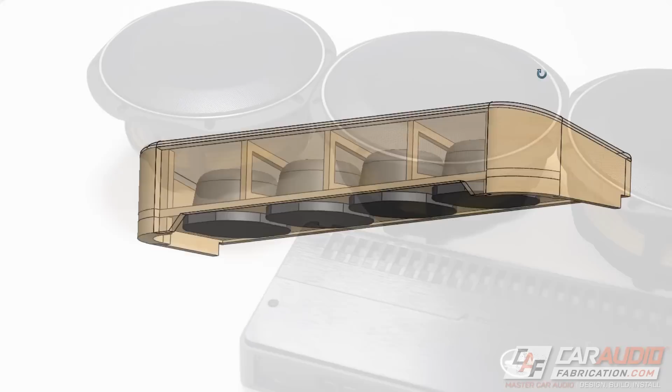I'm currently working on making an underseat subwoofer enclosure for a truck that will hold 4 10-inch subwoofers. In the last video, we went step by step and we came up with this design. Now we could very easily just wrap this enclosure with carpet and install it into the vehicle and have a very cool build. But you guys know that here on this channel, I like to spice things up a little bit more, and we're going to be doing some cosmetic features along with some beauty panels.

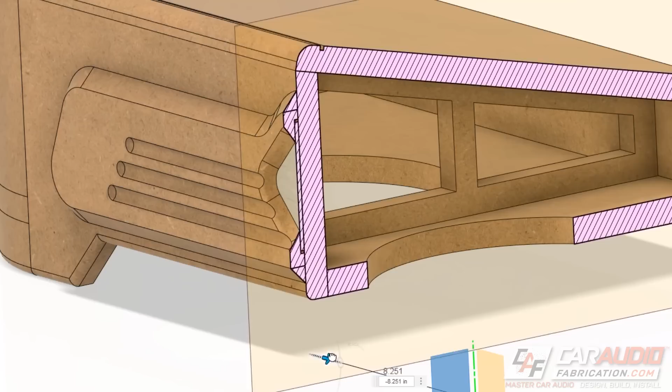All of this is in an effort to make the subwoofer enclosure look like it belongs as part of the vehicle. So in this video, we're going to get into those details and we're going to come up with a plan.

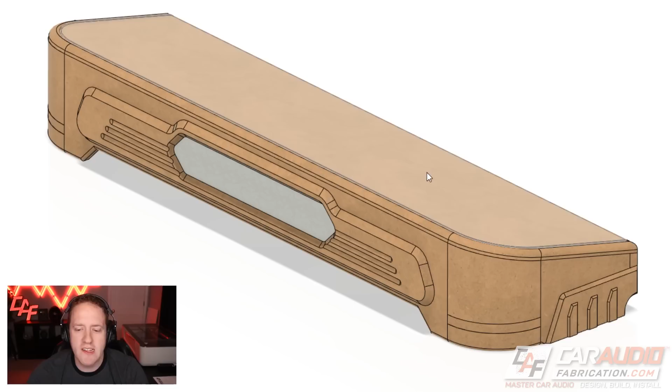Alright guys, so here we have our finished design, and if you watched the last video, you know that I like to start with showing you guys the finished design. That way you kind of have an idea what we're working towards as we go through each of these steps. So I'm going to be kind of brief here, but check out, we have a design on the side here. Kind of remember what this looks like in your mind, and then we also have a design on the front here. Again, kind of look at those angles and the fact that there's a lot of chamfered edges. Keep that in mind because we're going to get into the vehicle DNA.

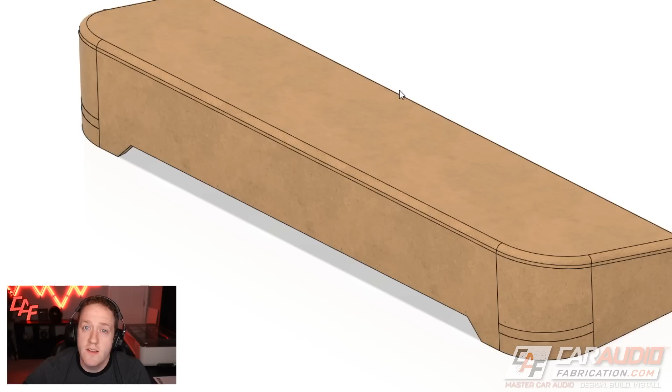It's got bracing on the inside, and it's got an angle cut on top because it's going to be sitting underneath the seat. It also has rounded corners on both front edges to match up with the front corners of the seat, so it's not sticking out at a hard corner there, it actually matches.

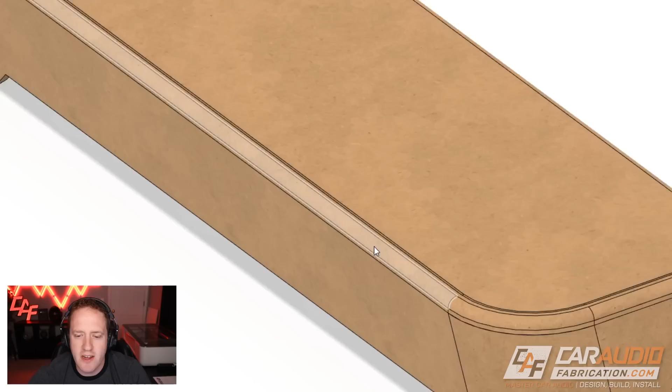The first thing I decided to consider was how I was going to transition the different materials. I knew that on top of the enclosure I just want to carpet it, since carpet will do a better job of being durable as the seat folds back against the enclosure several times. If that was vinyl all the way across, you could end up with lines as the seat rubs against the top.

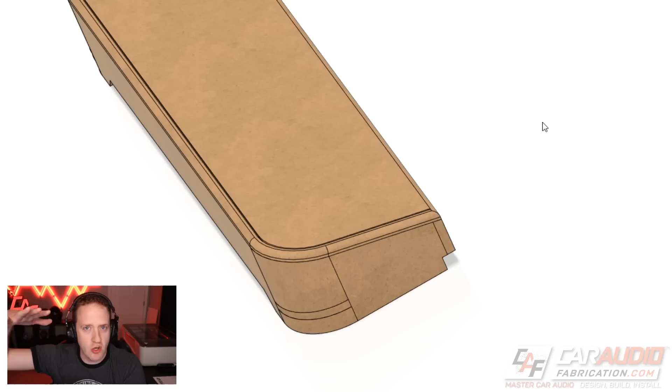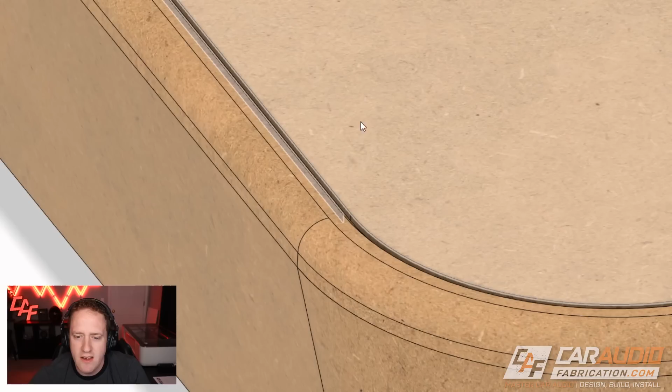We want to keep everything durable, so I used carpet for the top surface, but I want a refined look, so I used vinyl for the front and sides. For that reason, I need a transition gap where I can wrap the vinyl from the front and sides and tuck it in before transitioning to the carpet. So I modeled in a nice 1/8 inch gap that I'm going to make using a router when I actually build this enclosure.

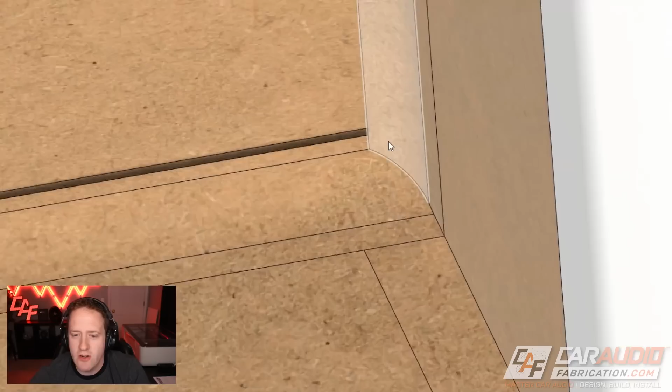Now if we look at the back side of the enclosure, so far where I modeled this, it kind of ends right here. I need it to transition around the back side because I want my vinyl to wrap around this corner and have the back side be carpet as well. So I also created a sketch and extrusion to make that cutting path too.

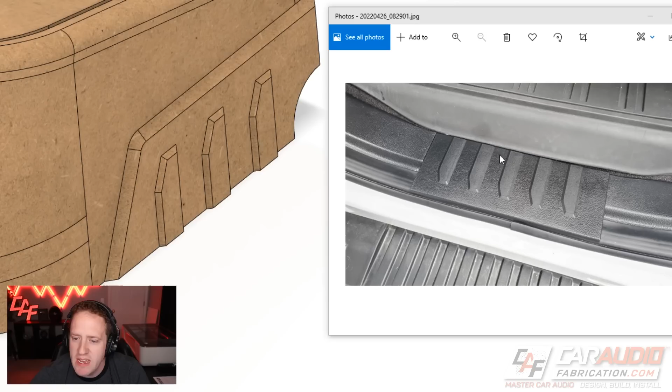We always want to be thinking about our finishing materials as much as we can as we go through this process. On the sides of the enclosure, I wanted to add these features, the design intent being to match the side of the door sill. I wanted to make sure these details were very similar in appearance, not only in how they looked but how they were scaled, so I took a couple quick dimensions of the actual vehicle's notches on the door sill and used those same dimensions to get the same angle on our design.

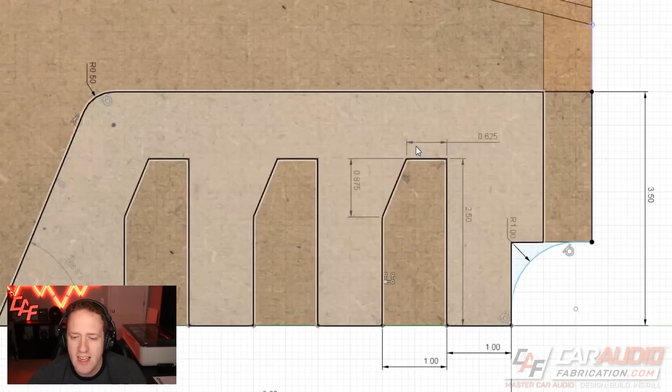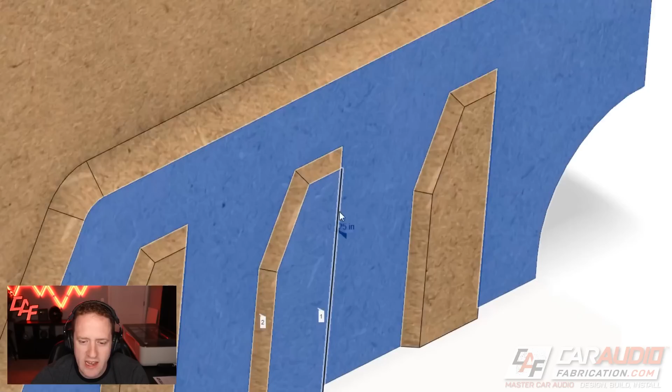Now I want to make sure these details really have some dimension to them, so this is going to be made from two different pieces. This surface and behind it is going to be one piece, 1/4 inch thick, as you can see from the measurement. Then these details on the front that I'll cut out are only 1/8 inch thick. So overall it's going to be 3/8 inch thick on those parts we're going to wrap with vinyl, which doesn't sound like a lot, but once we put the vinyl over them, it's going to have quite a bit of dimension.

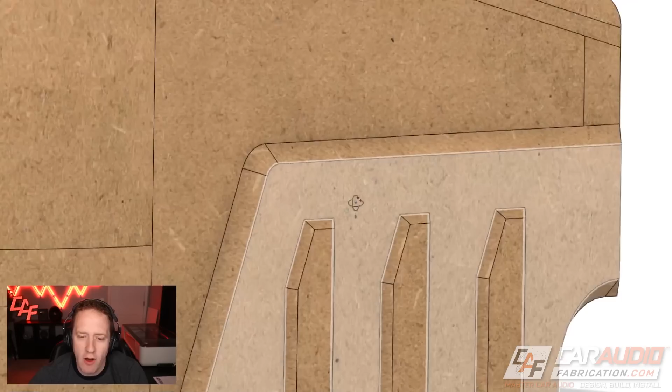Remember that angle we talked about earlier that we wanted to incorporate? That's why I've added that there. I've also modeled in some chamfers because there's a ton of chamfers throughout the interior of this vehicle, which I can easily do with a chamfer bit on the router once I make these pieces. Now look how this angle here is very similar to the angle on the outside of this overall insert.

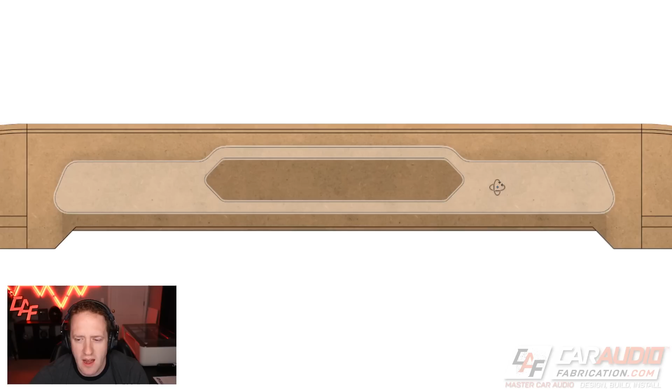To come up with this insert, I started out creating this sketch on the front of the enclosure. I then extruded that into this piece that I'll be making. And since this is an insert, I want it to actually insert into this outer ring here, so I had to model up that ring by just doing an offset of this geometry.

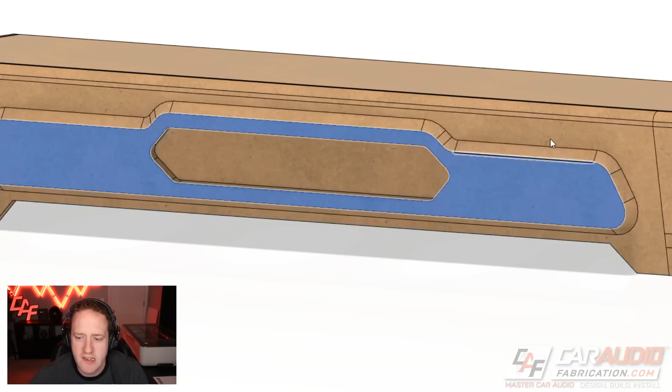What's cool here is I don't necessarily have to make this ring out of wood. I could use fiberglass materials like body filler around the outside of this shape, or I could cut it out of wood to probably save some time, which is what I'll likely end up doing. Once I cut that piece out of wood and add a large chamfer, we basically have a simulated body filler insert made out of wood, which should save us some time.

I will probably end up adding some body filler around the outside anyway, just to really smooth everything out completely so that you don't notice this hard edge wrapped in the vinyl. It will give it more of a perfect look.

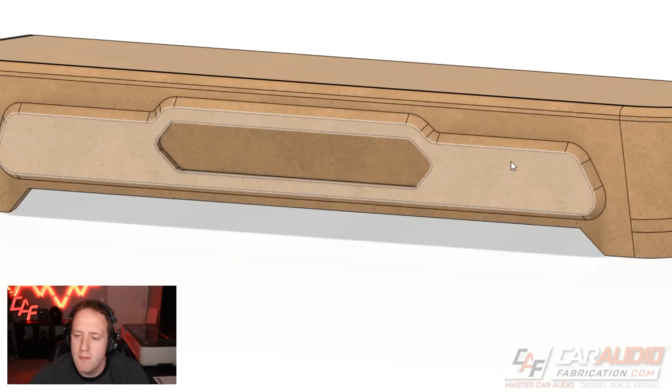But regardless, now we have that insert surrounded by an outer chamfer. Again, because those chamfers are so common, we want to add a chamfer on the inside of this viewing window here. The plan is on the inside here, I want to have some acrylic that's going to have the logo and the different companies that are sponsors of this build.

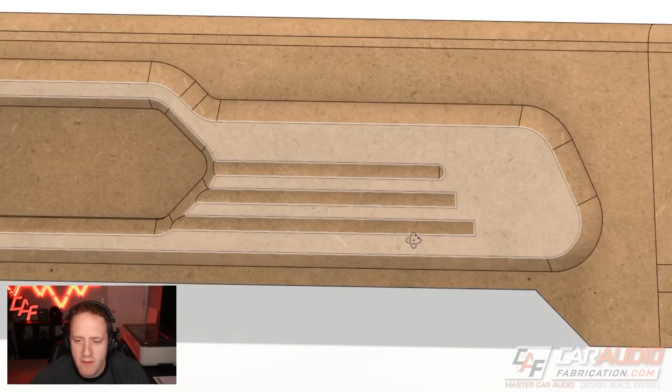In the meantime, you can see I've also modeled these 3 lines here. What those end up being, if we step further through our design history, is some additional details that I'm going to make with a bullnose bit using the router on the front of this piece. I of course want those details to carry over to both sides of the enclosure, so I'm going to mirror that feature as well.

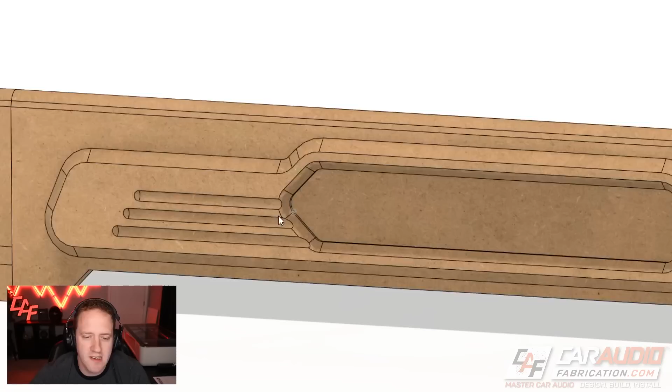One of the reasons I really like planning out all the different router pass cuts I'm going to be making is you can just get a feel for the final geometry. This would be hard to really visualize in your head, how these different arcs end up combining with this chamfer right here. But when we actually model it and model those cuts, we can see how that's going to look when we build it, and I actually kind of like the way that this looks.

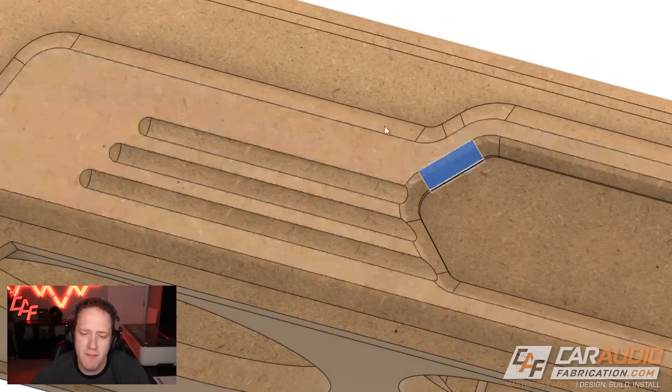I think it looks kind of non-organic, but interesting and cool. And I think it continues to carry that design DNA of having the chamfers, but in this case, we're combining it with something a little bit different that adds some additional extra flair.

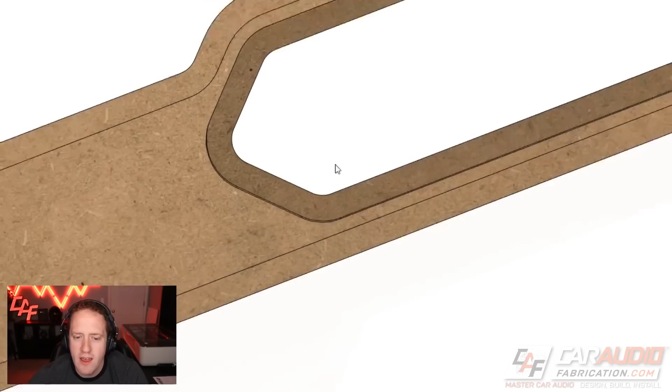Now I want to make sure that I have a plan for how this acrylic piece is going to fit inside of our insert there. So what I've done, if we go ahead and hide the subwoofer box and turn this around, you can see that I've modeled that piece of acrylic in there. And if I hide it, what I've done is I've cut myself a nice little pocket on the inside that acrylic can sit into. Again, it's good to get a feel for all these different dimensions and the different size router bits that you're going to need to use to cut all of these different locations for our different pieces to fit together.

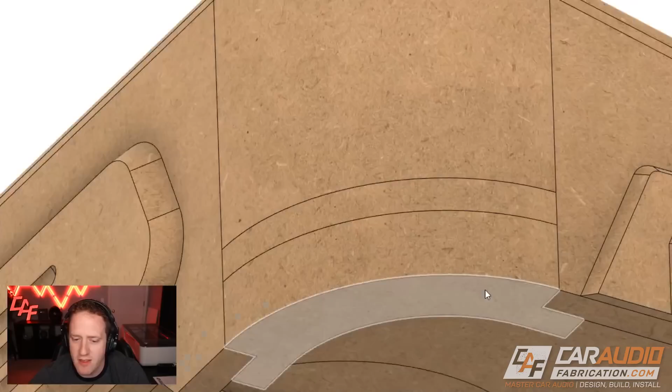Now I've made plans for how the vinyl is going to transition from the front and the sides to the top of the enclosure with that slot we talked about earlier, but what about the bottom of the enclosure? We need to consider that as well. Right now, that vinyl would have to come over this hard edge, and this is on the bottom side of the enclosure, so obviously you're never going to see it. It's going to be resting against the floor, but we do want to have a good plan of attack here. So I do want to soften up this edge.

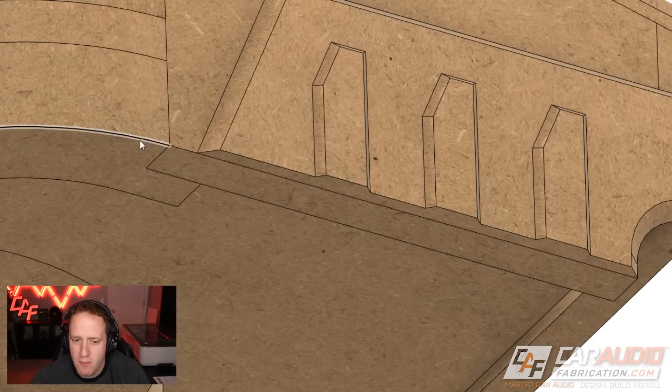Now this is a problem though, because if I run this on the router, let's think about this. I can have these edges rounded over, no problem. I can come around this side, have that rounded over, no problem. But once I start to transition over here, it's going to get weird looking on these. If I add a round over, we want those to have that nice hard edge still.

So what I can do is I can actually model a round over on this part. You can see it carrying through there, but let's do a little bit more detailed round over on this here. We can see we transition from a full round over to nothing, and we can do that on the router just by stopping our router bit. If we stop the router bit right here, we're going to have a nice transition from this smooth rounded edge to our design DNA that we're going for of that hard edge corner.

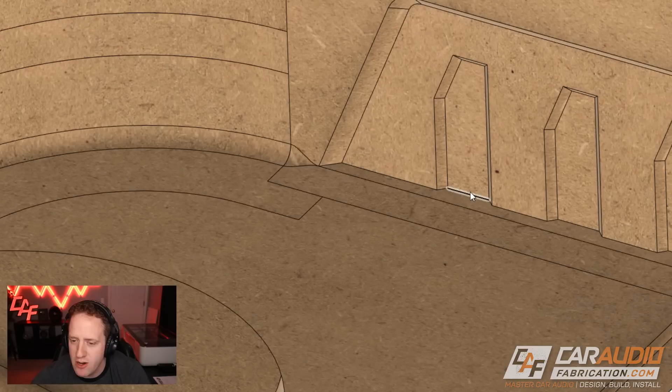Now I probably will take a little bit of sandpaper and just make my own edge here and finesse it in, again, just so that it's not super sharp. It gives a little bit of a rounded edge. I may even use a really small roundover bit on that edge just to finesse the details and make it look perfect.

So that's our full enclosure design. So we have a plan now. Now we can build this box, which will be the next videos here on the channel.